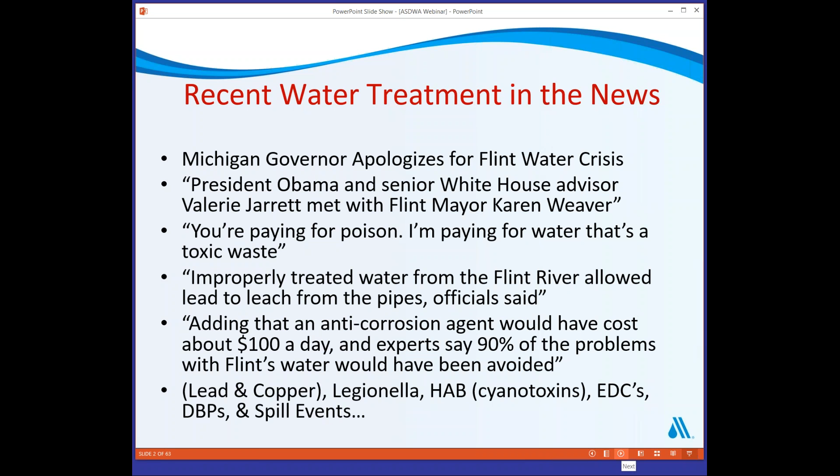Unfortunately, the story is rarely about the most safe drinking water in the world that makes the headlines. Regular news stories seem intent to attack utilities and question the safe drinking water, which in fact diminishes the public trust. There are a lot of different aspects, including lead and copper, but a lot of different stories have been in the news on water quality lately.

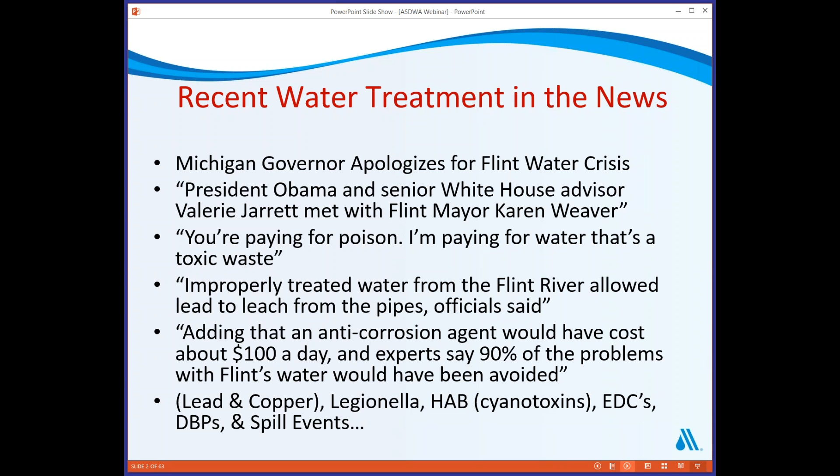So why go above and beyond? Well, and why use the G100? It's to minimize risk, improve and provide a positive public perception. And in the world today, it's difficult for a utility to say, well, I'm meeting all the minimum requirements, or I'm doing the least I am required to do.

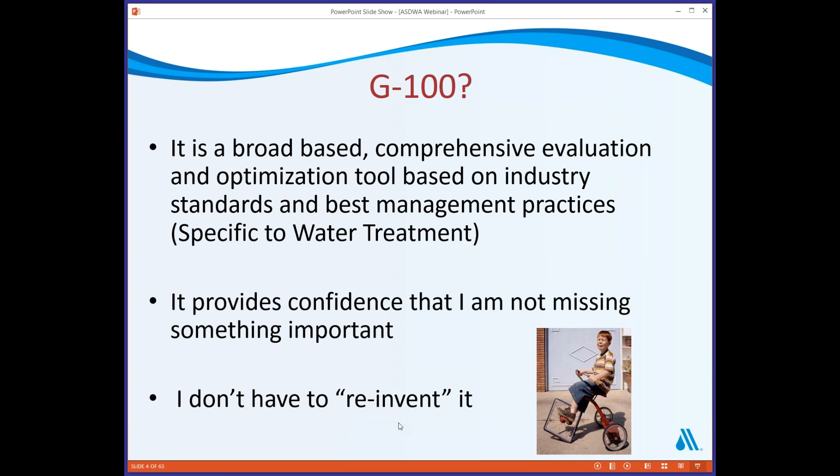So the great thing about this is I was looking at the program. It's already there. We didn't have to reinvent the wheel. It's exactly what we were looking for.

So what is the G100 standard? Well, I'll just go through it. It's a broad-based, comprehensive evaluation optimization tool based on industry standards. Eva mentioned some of this. It's based on best management practices for water treatment, written by treatment plant people who looked and said, okay, what are the best management practices for optimization of a treatment plant? And we went through this and decided it's a great tool to make sure that we're not missing something.

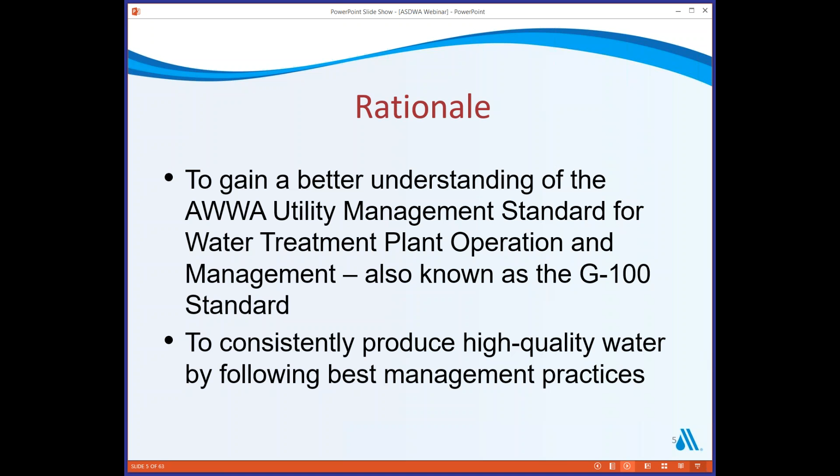One of the things I'd like to do, well, the goal is to provide a better understanding of the AWWA Utility Management Standard. Our utility experience, what we determined was it was a very valuable tool to reliably produce high quality water using the best management practice.

The standard's easy to use, it's straightforward, it goes step by step so that you can evaluate opportunities for improvement in your water treatment plant. It provides an everyday tool for plant optimization.

As I go through, I'm going to reference both documents. There is the AWWA G100 standard, and then there is the operational guide. We used both, the standard written in 2005, the guidebook in 2011. What's the difference? Well, the standard spells it out, and the operational guide gives you a how-to, an evaluation and improvement tool.

So the concept of the operational guide was it's a guidance tool. Our experience was it was extremely valuable with additional information and insight. It was especially good as a self-evaluation tool, as it is very comprehensive.

It's laid out with 4 major categories. As you go through, you look and say, okay, the plant shall satisfactorily meet the regulatory requirements. And the second one, operational practices. These are like limitations and resources.

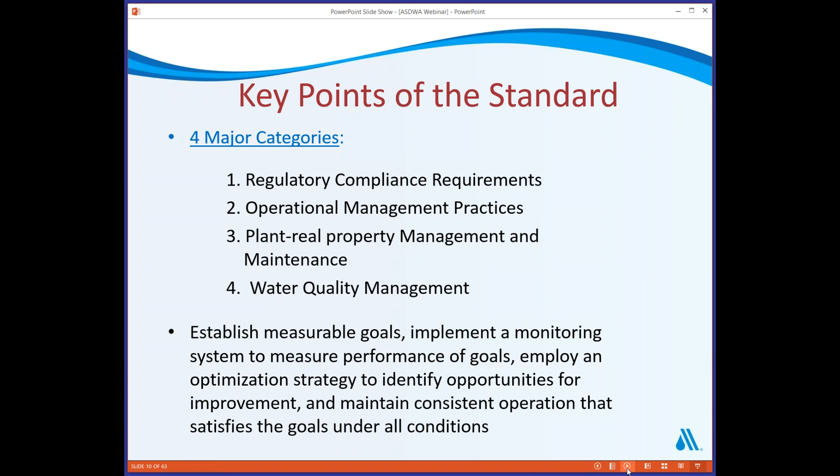And the standards are laid out as a process where you set your goals, you measure performance, you implement change, and then how do you maintain that?

As Eva mentioned, this was introduced to our AWWA section, and the way we did this, we took trainers. We had someone from each of the utilities, and we wanted to have a peer review process, and so each of the participating utilities sent one person to be trained so they could be a peer reviewer.

Then the utilities agreed that they were going to go through and do the self-assessment using the standard and the guidebook, and then at the end, after they were done, they had the opportunity to submit it to their peers for review. And I think it's important that the peer review was an important part.

Because each utility knew that their peers were going to be looking at their work, I think it helped put some extra effort into it, but also having that extra pair of eyes looking and making recommendations, it was really good. As utilities, we worked together on this, and we started by saying, okay, we might find areas to improve, but we have nothing to hide, so let's go do this. And we said, let's do it.

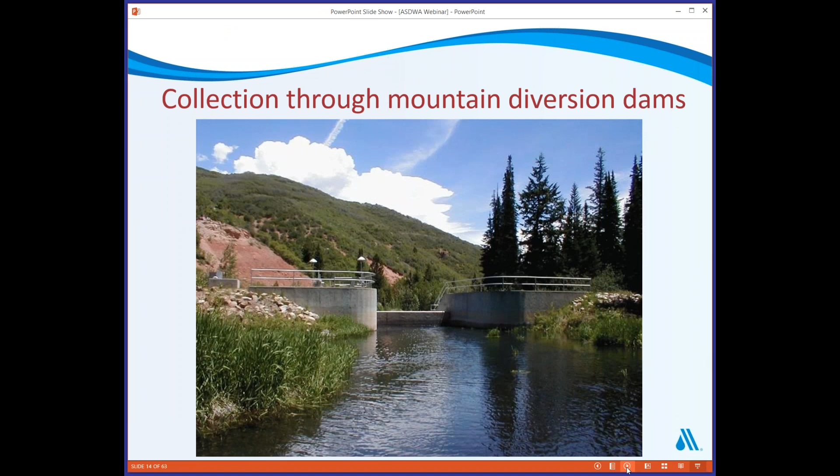So going along, we collect and store the snow melt water. We then divert that water through pipelines and diversion dams. I'm basically just bringing you along from the east side of the state to the center part of the state.

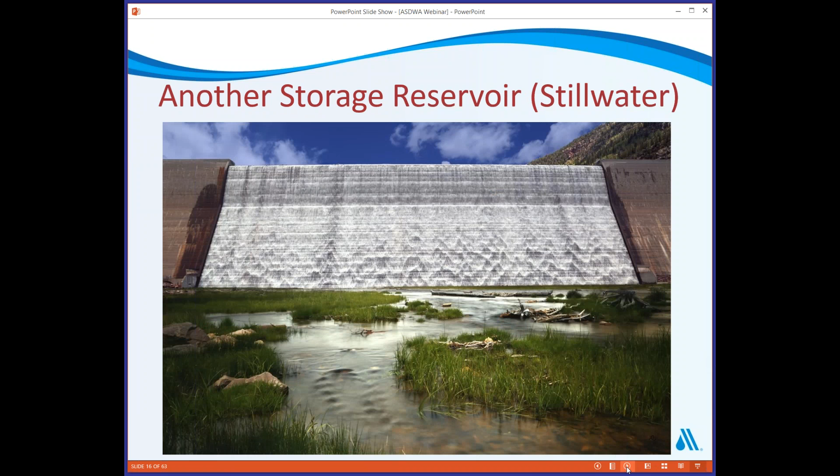Here's a high mountain storage reservoir, with water going over. This is a different dam where the water goes cascading.

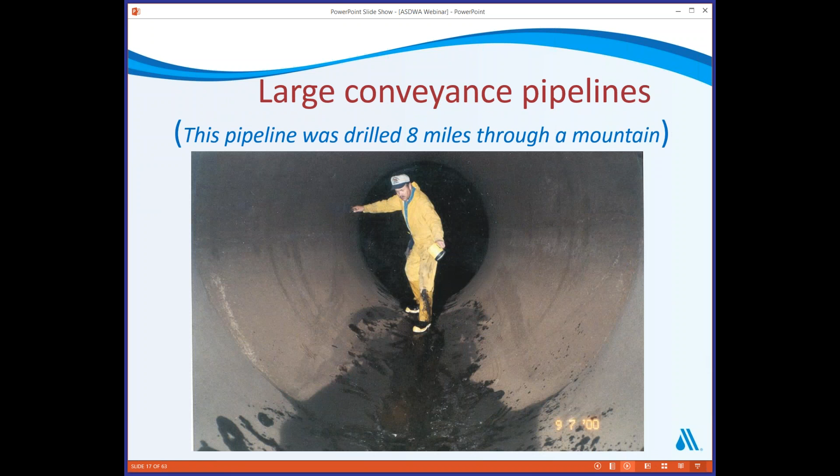We have large conveyance pipelines. This pipeline is drilled 8 miles through a mountain to deliver the raw water over to the Front Range.

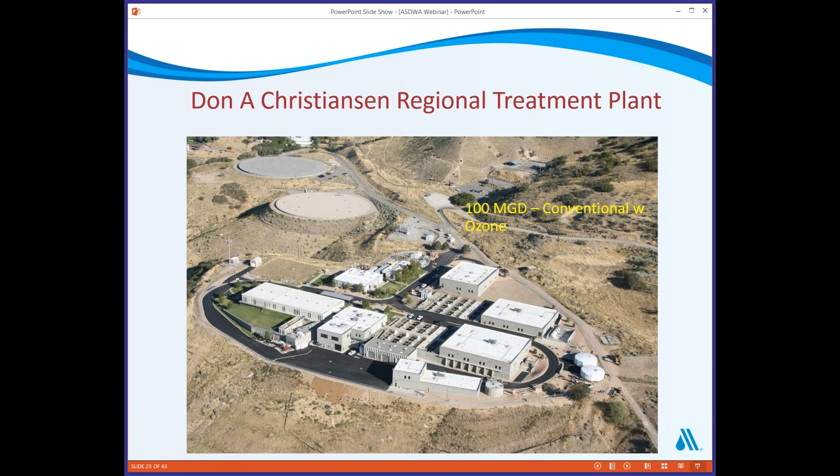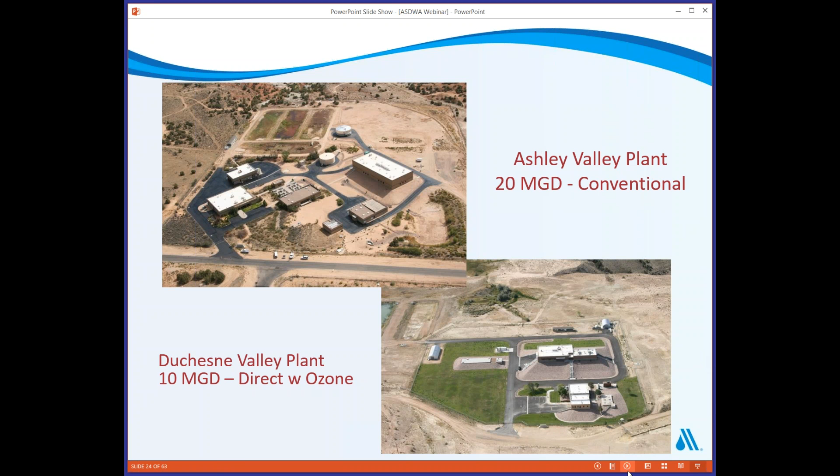We use enhanced coagulation. And the Duchesne plant is a 10 MGD plant, direct filtration, pumping out of the lake to the treatment plant, using ozone for disinfection byproducts.

Each of these plants has their own unique challenges. Here's a list of some of them, just so you can see we are not unlike other utilities. We have challenges, and meeting all the rules and regulations takes some effort and work. But we have the same operational goals at each plant.

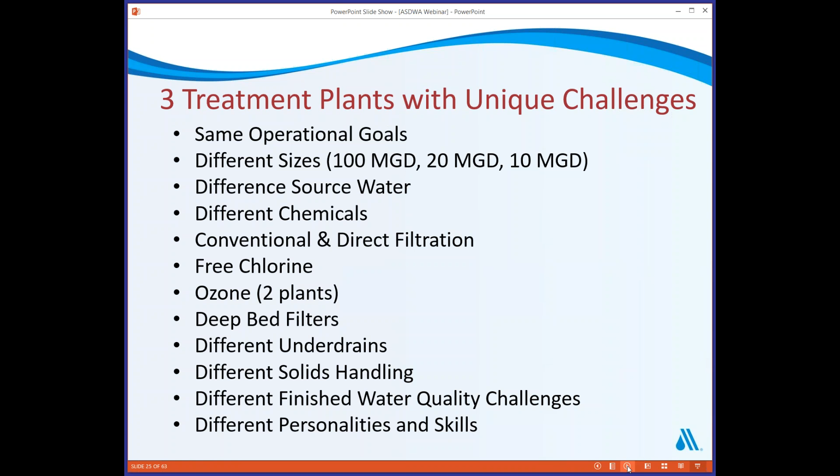They do have different chemicals, different sources. Two are conventional, one is direct. Two have ozone, they have deep beds, different underdrains, different ways of handling solids, different water quality challenges, and different personalities and skill sets of the employees.

In general, we're doing quite well. All 3 treatment plants are Partnership for Safe Water water treatment plants. The Don A. Christiansen plant was only the 2nd plant in the nation to receive the Partnership Phase 4 for optimization of the treatment plant processes for turbidity removal.

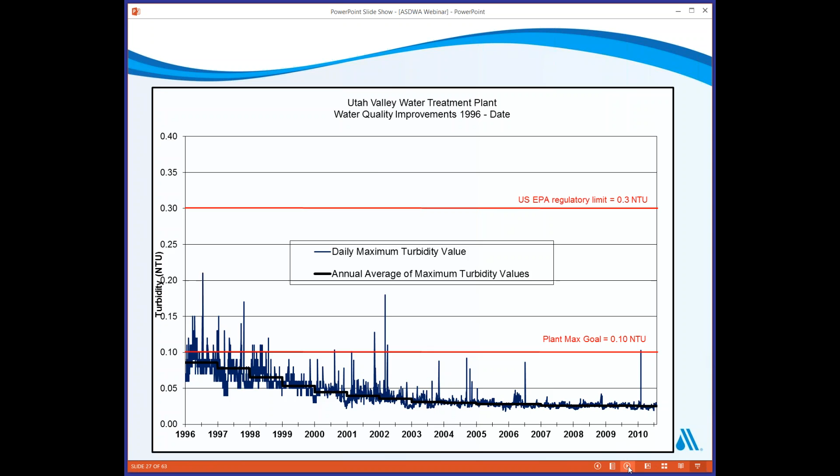So when I asked all the plant managers to look at an opportunity to improve, I have to say some of them said, well, improve on what? Our finished water turbidities are great. They were not necessarily all excited, and they're correct.

But I asked a few questions. I said, turbidity is great, but how about lead and copper, disinfection byproducts? How about operating in a cost-effective manner? Is there anything missing? There are standards out there that you may not even know about. So let's go through and see if there's something you could possibly improve on.

If not, I'll give you all a pat on the back, and we'll celebrate. So we talked about some good business reasons for change. We pulled everyone together, and here are some of the reasons we came up with for going through this process and doing a self-evaluation. All of the staff agreed these were good reasons, and they said they'd put some effort into it.

We met together and provided both the AWWA G100 guide and standard to each plant. Then we developed an audit checklist where we're able to go through this together, just like we asked the question: with compliance and regulatory requirements, are we meeting all the regulations, or are we just trying to do the minimum amount?

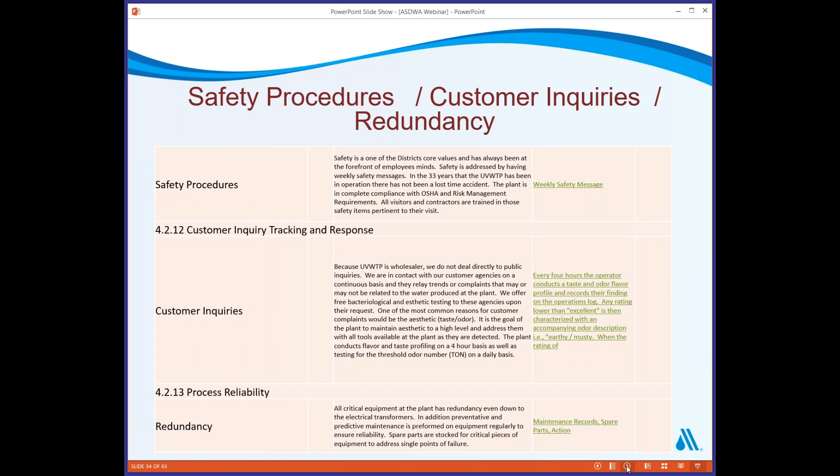So we recognized that was a limitation, and we put some things into place, doing work in the watershed and in the operation of the reservoirs, and we haven't seen that happen again. It's something we did have control over.

Some other things we did with that, I'll back up. With our filter performance, another thing I wanted to share was we looked at our filters and did what we call filter forensics, where each month a different operator is assigned at each plant to look at the worst filter run of any given day, evaluate what happened with that filter run, and discuss what we can do to improve.

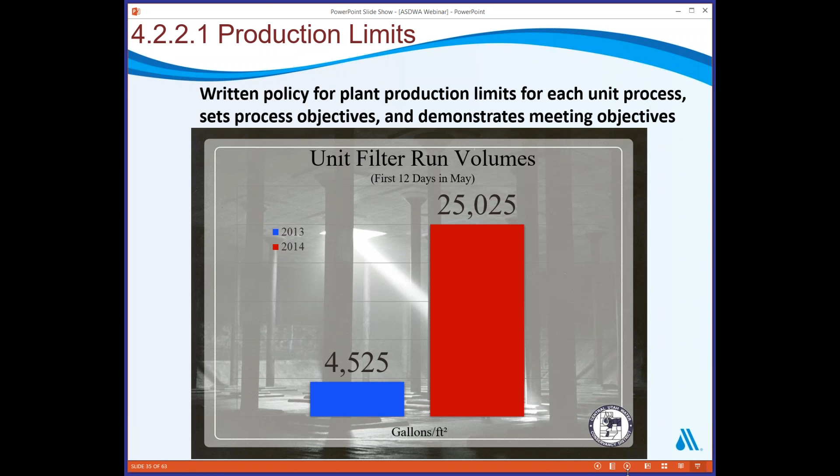So moving on, I mentioned that this is a comprehensive program. It goes through a lot of things that many utilities, water treatment plants might not have their arms around all of this in all of these different areas, and it breaks it down.

Writing the SOPs was an important one for us. I assigned the plant managers to provide two standard operating procedures each month, and they decided, well, let's get this done. I'll send you one a week. They assigned different plant personnel to write the SOP, and then they reviewed it, and then they sent it to me.

Why is a standard operating procedure so important? Well, it allows the operator to confidently know what to do. It provides for succession planning. It's a training tool. It gives them all of the information at their fingertips, especially in the middle of the night when something goes wrong. They have a place to go to make sure what they're doing is right.

We didn't have a good program to check each load of chemicals. It was just an area we were short in, and we went through and said, okay, what is the quality assurance program that we should have that we don't have? And we worked on that, and we feel like we have a good program across our organization.

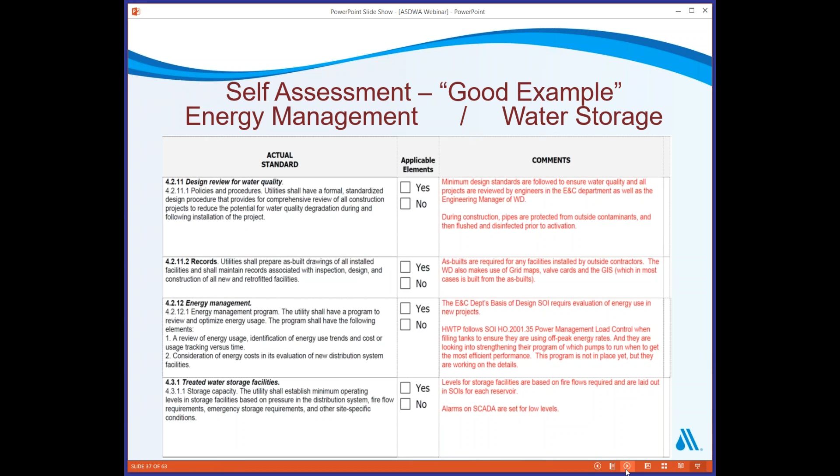So one of the things, one of the new managers, I had a new plant manager, and he was particularly happy to have this as a tool. He said, as a new manager, it helped him identify areas that he didn't even know were of concern.

There were gaps in his knowledge, of course, as a new manager coming in, and he just said, here's some of the pieces that are examples of the chemical QC, the operating goals, and all these inspection frequency and system failure. All these things were so helpful for him in developing a program.

He said they started with the audit, and they were checking the boxes yes, and then they realized they had a lot of work to do, but it was okay. They also had time. And he said he thought they were doing well until they looked and said, here's the industry standards, and they're standards of things that we should be doing that we're not. And he says, now we have real goals, we have confidence that we're not missing something. It's been a team builder because they did this together, and he says as a result he sleeps a lot better at night knowing that he's not missing something.

One of the things we did is we took our time and said there's not a rush. We'll have some fun. We worked together. We set a time every Thursday morning for an hour. We're going to meet together and go through and evaluate and train. And that's worked well for us.

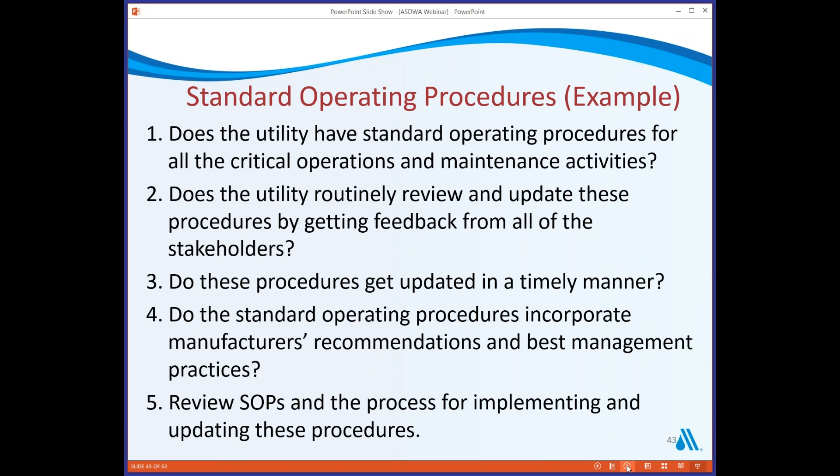One of the things we did, we put together from the standard operating procedures, writing the SOPs, it goes through and asks these same questions, and from that we put together an operations manual that is the guide that our operators use in making decisions, because 75% of the time our operators are there by themselves, and it's become a real valuable tool to them.

One of the questions asked is, do you have unattended operations at a treatment plant? Well, our two smaller treatment plants are not operated 24 hours a day. There's only someone there 8 hours a day, 7 days a week. And the rest of the time, the computer system is monitoring and sending information. There's an on-call person, and they have a laptop and all of that.

But this goes through, it says, if you are going to have unattended operations, you should include the following. And we went through, and this was very helpful to make sure, and we found a few things that we needed to improve on, because if the plant is unmanned 16 hours a day and something goes wrong and you're not there to catch it, the computer system needs to catch it, and there needs to be some fail-safes in place, and we were able to put in some clamps so that even if it didn't call during that period of time, the plant cannot make changes outside that small range.

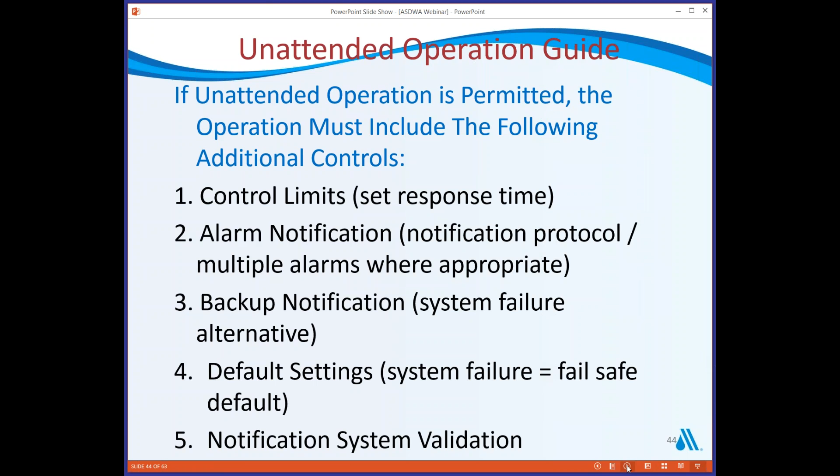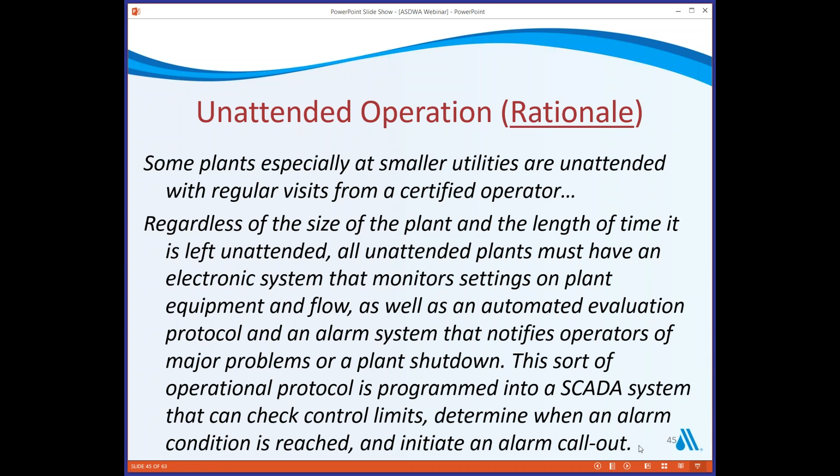And we went through and said, okay, we validated and we made sure it worked. We practiced, we did drills, and we developed a standard operating procedure that says this is what we do to protect water quality even though we're unmanned 16 hours a day. Here's our protocol and what we did. And we did some additional programming and put in a fail-safe, and the plant can automatically shut itself down, and as a result we feel much more confident that we're doing everything we should do.

This is another example of an audit checklist, and another utility that went through and said using the operational guide, here are some things that we're going to evaluate and do, and here's our instructions, and this is just an example of taking action.

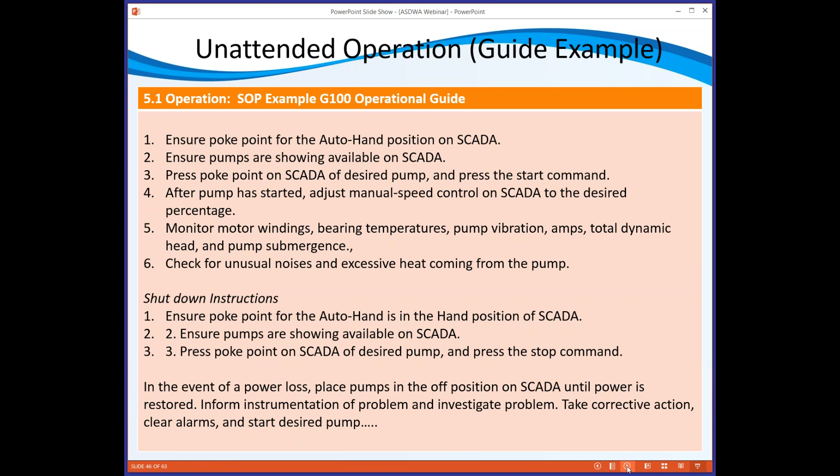So, summary. Well, the standards provide this operational tool. In our experience, it's been an extremely valuable tool. It's using the best practices. Using that, we went through and the self-evaluation, it was right at our fingertips. We didn't have to hire an engineering firm, it's a very cost-effective self-evaluation. It's comprehensive. It helped us optimize and prevent plant upsets and preserve water quality. It has you look at where are you and where should you be, and helps you with financial planning and make sure that you have the ability to meet the future needs. It addresses critical knowledge loss and provides for succession planning.

Through this, we are better able to train and retain qualified employees. We've mitigated risk, and we have a program to better reach out to the public and our stakeholders and share with them the true value of water and what it costs. We've enhanced customer care, and we've taken our staff from laggards to leaders.

So, recommendations for us: the peer review process was very good. Some utilities may choose to just do a self-evaluation and end there using this tool. But others might organize with state agencies and include an engineer that might do a sanitary survey and say, here are the things we're doing. But I like the peer review process, to have that extra set of eyes.

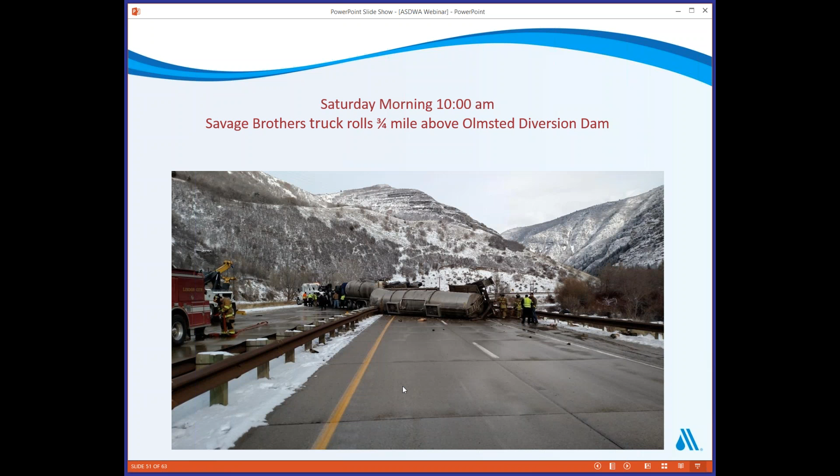So here it is, Saturday morning, 10 a.m., a year ago. This truck rolls. It's carrying crude oil down the canyon right next to the river, 3/4 of a mile above our diversion dam. And what does it do? It spills crude oil into the river.

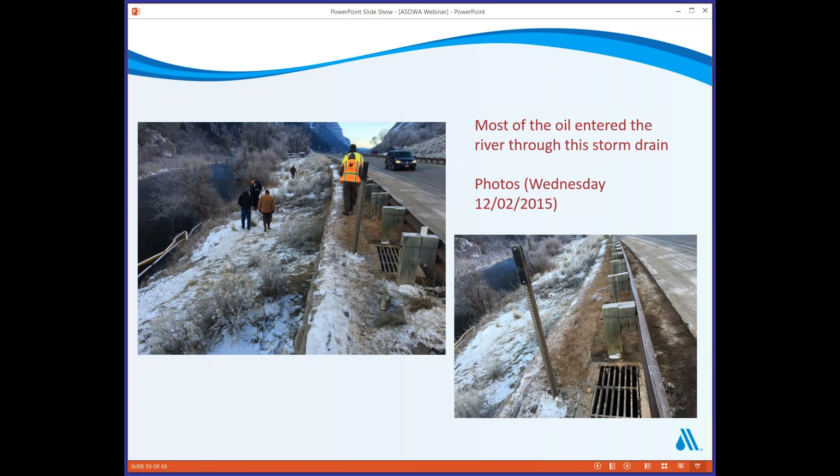The way the crude oil actually got in was these storm drains along this highway drain right into the river. Not the best plan, but that's the way it is. That's how most of the oil actually went right into the storm drain, and put over 1,000 gallons of crude oil right above our intake. You can see that some of it did go over the top, but most of it went right out into the river and hit the river.

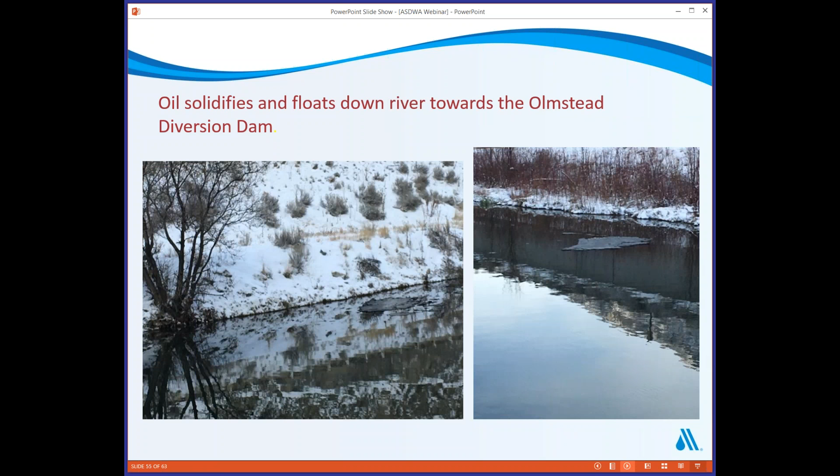Now, this oil floated on down and was going right towards our intake. And so what was interesting that happened here, I'll show you a little bit of the background.

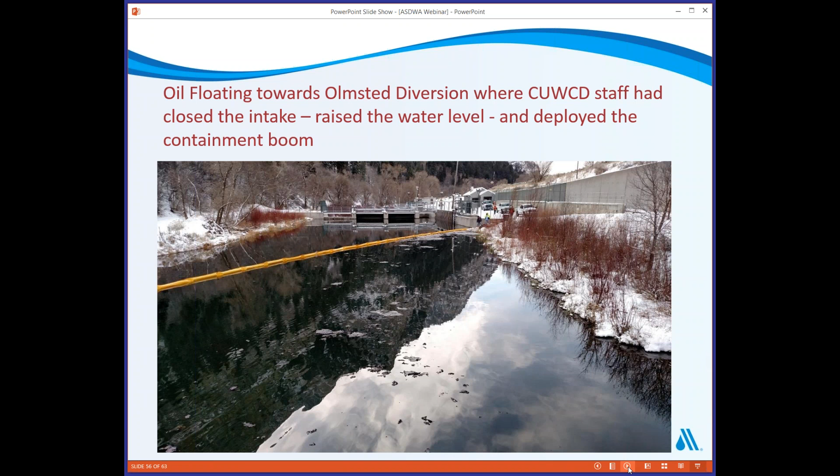We had recognized that we had this yellow oil boom that's going to collect the oil as it's coming down. We had purchased those, we had them in that building, but we recognized that we had never practiced deploying those booms. So one of the things we did is we identified that it's one thing to purchase this emergency equipment, it's another one to actually know how to deploy it. And we recognized as we practiced that we didn't even have the eye bolts to hook this in. We were holding it by hand.

So we made some changes. We practiced and we put an SOP together, and we had a game plan for when a spill happened, and we gained some confidence that we knew what to do when it did happen.

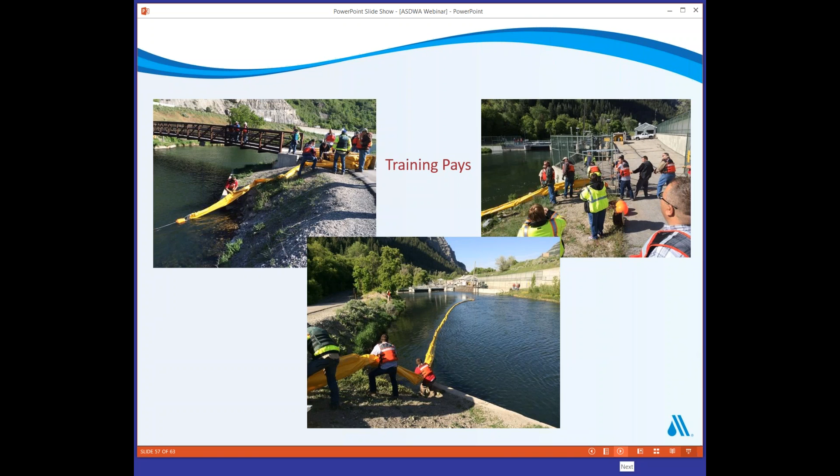In addition, we depend on emergency response people in the canyon, the highway patrol, the county sheriffs, to call us when there's a spill event. And we recognize that we have a detection system at the intake dam, quite a very good water quality monitoring equipment right here at the diversion dam. Well, that doesn't help us very well if we don't get an advanced call, because all that means is you've now let poor water quality get into your pipeline.

So we then said, okay, we need to enhance this, and so what we do is we meet with all of the emergency response agencies. We put together a one phone call to one number that takes care of all water emergencies. Each year we bring the emergency response people to the water treatment plant, then we take them up and have them understand the critical nature of this, how over half the state's population receives their drinking water through this one location, and that we need advance warning. When they get a call of a spill event, we need their emergency response to call this one number.

What happened that was so important is with that training, the first officer on site called dispatch, and they called us. We were 3/4 of a mile away, and we had about an hour and a half travel time.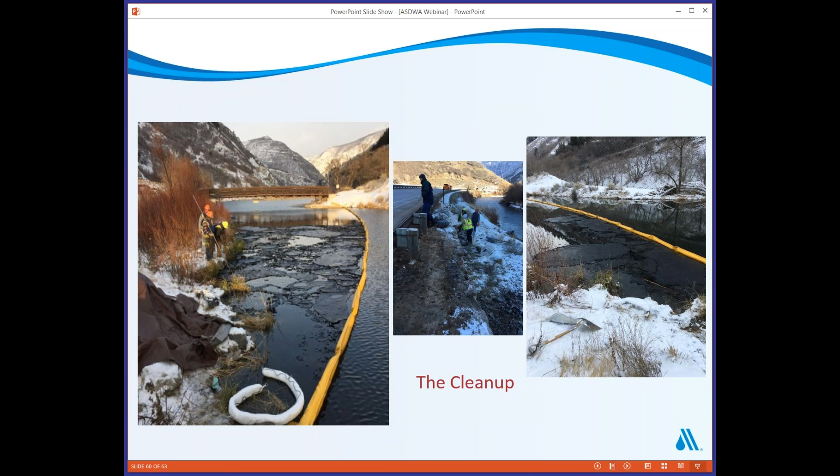this cleanup process. But because of our quick actions, we were able to contain all of the oil, and you can see here they are putting it in the dumpster.

Our plan was, once they got everything cleaned up, we were then going to pull our samples. When our test results showed 0, we knew we could then send water back to our customers. And our customer agencies, who we deliver this raw water to, were saying, okay,

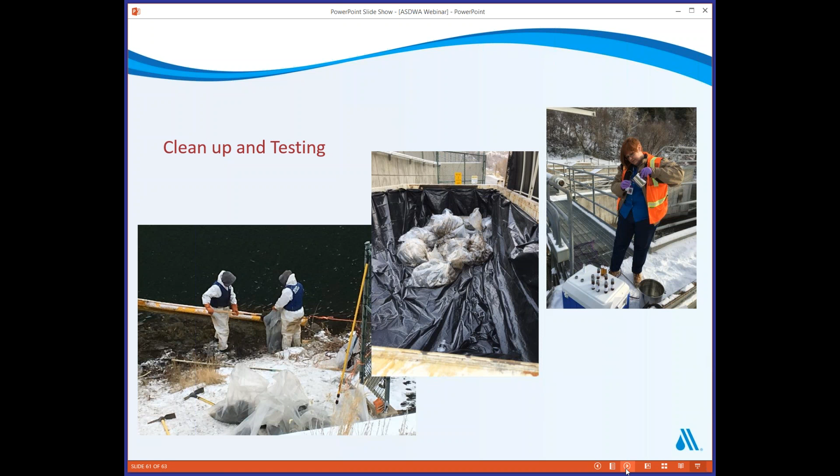we're not sure, you have to reassure us of what the water quality is going to be like. So we went through our plan, and they were very comfortable and said, wow, you guys have done a great job in preparing for this.

And so here's kind of a summary. By Friday, December 4th, the cleanup was substantially complete.

I talked to the EPA person in charge, and I said, how much of this are we expected to get out before we start delivering water? And she said, normally in a spill in a river like this, if you can collect 20% of it, you're doing good—the rest is going to go downstream.

And she said, but you've contained it because of your quick actions and knowing what to do—I think we will actually remove 98% of all of this oil spill.

As a result, there was only a water loss for 6 days. It was quite a bit of water.

We left the containment booms in place and continued, and this was the EPA's response to us: she said, I respond to many spill events and provide a lot of training, and this spill event will now be used in all future training as the standard for how to prepare and respond.

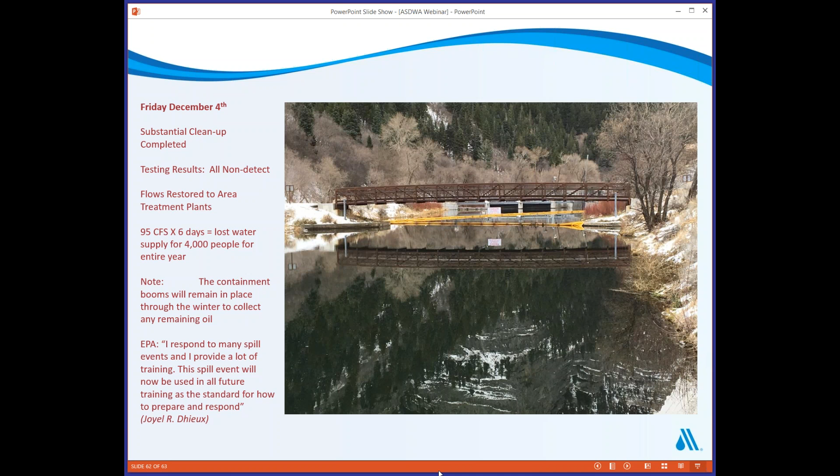That really goes back to just having a guide to go through, sitting down together, asking questions, and putting together a program to protect and preserve water quality.

So that's a real-life example of one way using the standards helped us be better prepared to minimize risk, to know what to do, to have a program in place, to utilize a comprehensive tool to protect and preserve water quality, and as a result, you'll hear me say, I sleep better at night. With that,